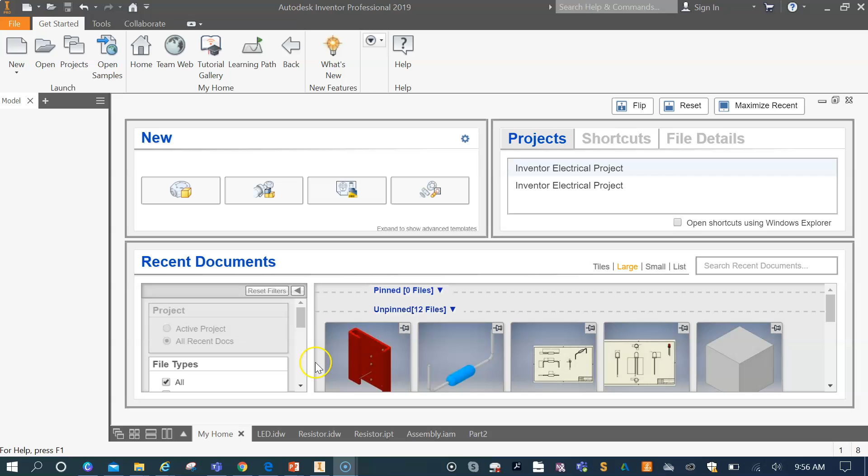So to make the drawing, we're going to go to New. I'm going to scroll down to the drawing section here. I'm just going to make this a little bit bigger so we can see. Alright, so the drawing section here, we're going to go down to this one here.

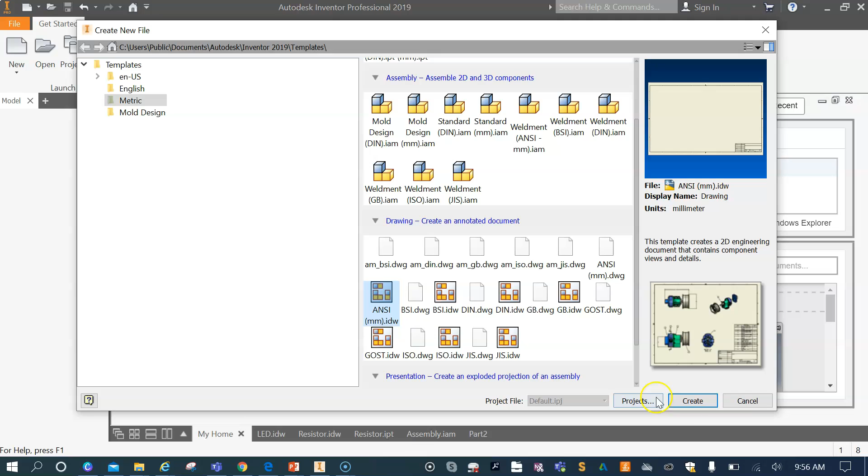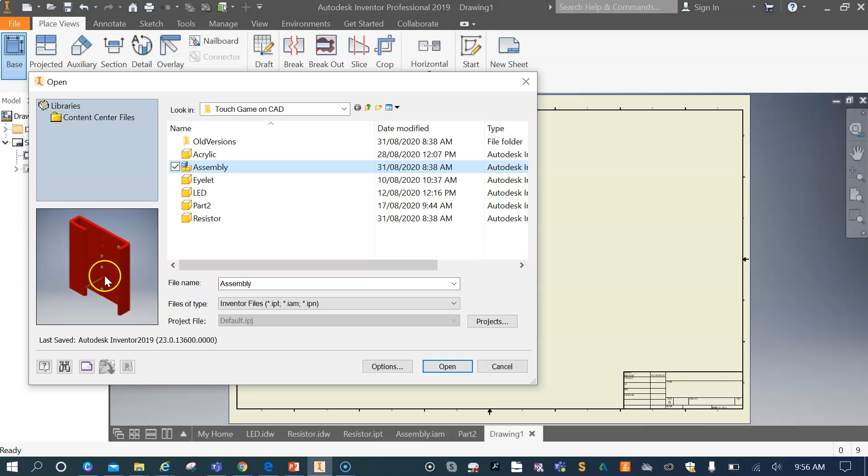Alright, so what we're going to do first is go to Base. And you need to find your file, so click on this icon here. And we're going to click on the assembly. This should have your eyelets in there, your LED, and the acrylic all together. Press open.

Alright, now we can start to see how it's all coming together. So that's a side view. We can increase the size here with the scale.

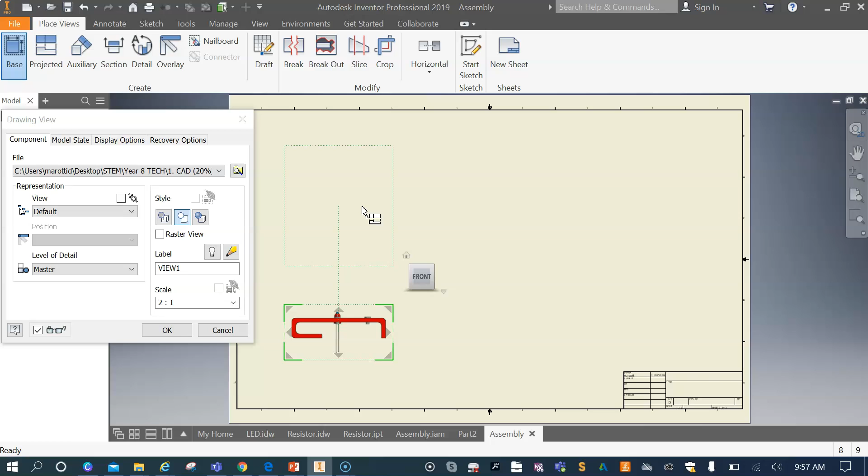We're going to put the side view just in the corner here. Then above, I can click—that'll make a top view. Click over here, okay, and that will show another view there. So in the corner as well, we can click, and that'll give us an isometric view of the touch game.

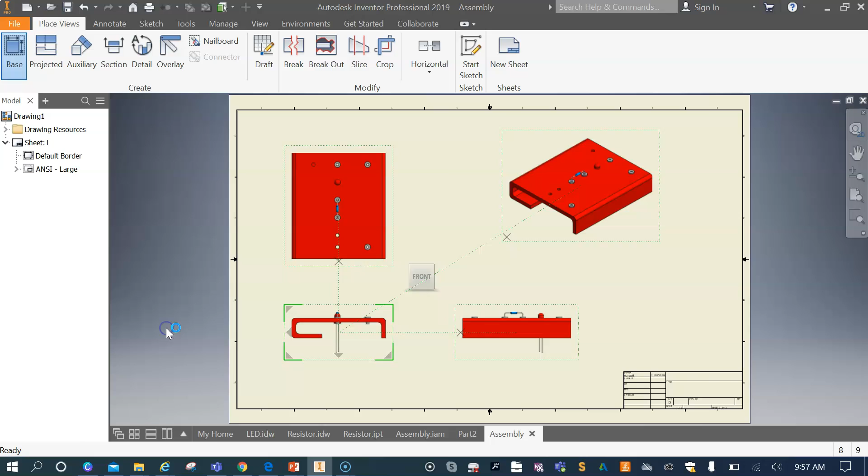Alright, we're going to press OK. Now can you see how on the top view we can't see any of the hidden lines underneath? You should technically be able to see the inside edge here of the acrylic, and same over here. So what we're going to do is double click here on the red section, and we're going to click on this one here, which is hidden line, and press OK. Now all of your hidden lines will appear.

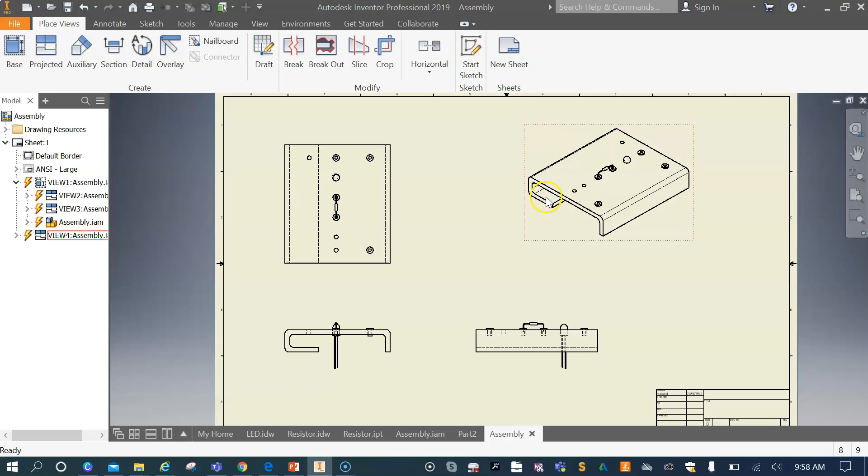With this one here, the isometric view in the corner, if we double click on it, I want you to click on Shaded and press OK. That's obviously going to add some color to it so we can see what it looks like as a finished product. Alright, what we can do now is come up to Annotate.

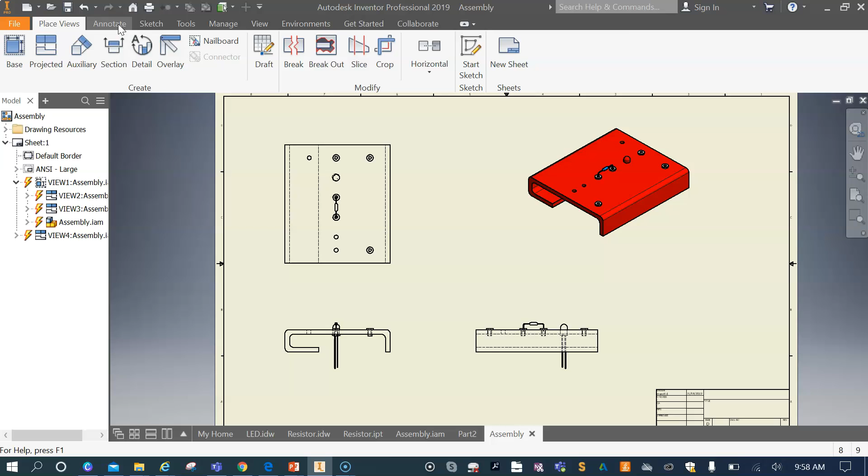Then we can go down to Dimensions, click on that, and now we can start doing our dimensions. Alright, so what I'm going to do is show you how to do the dimensions.

But I'm not going to do all of them—it's going to be your task to then go through and do it for yourself. I'll have a final drawing set up, and you guys have to just go through and try and do it as close as you can to what I've done, and try and get all those dimensions down.

But for example, if we want to get the overall width of the touch game, I'm going to click on one side, click on the other side, and I'm just going to place my dimension there. Just press OK. If I zoom in, there you go, it's 78.

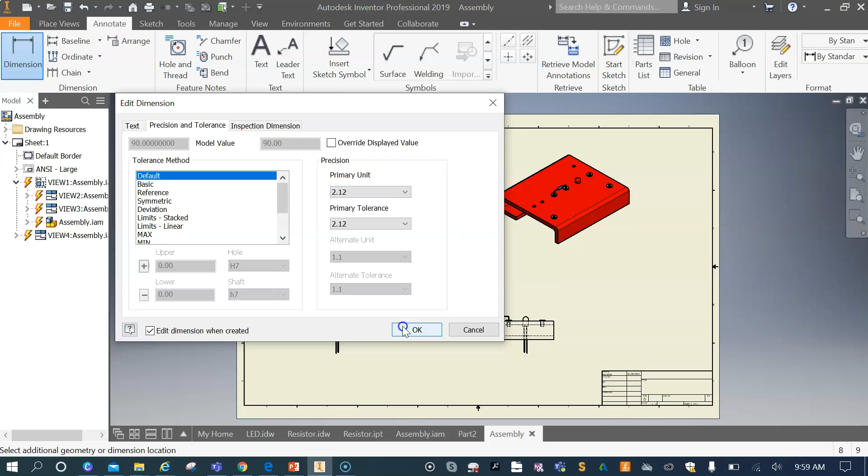Alright, we could grab the total length here as well. Click again, press OK. As you can see, that one was 90.

So you're going to go through and display all the dimensions that I need for your assessment, based on the drawing that I give you. You guys are going to have to work that one out for yourself, but that's just using the dimension tool.

Now what we're going to do is edit this little title block here in the corner. See how there's all this information that hasn't been entered in here yet? I'll show you how to do that now.

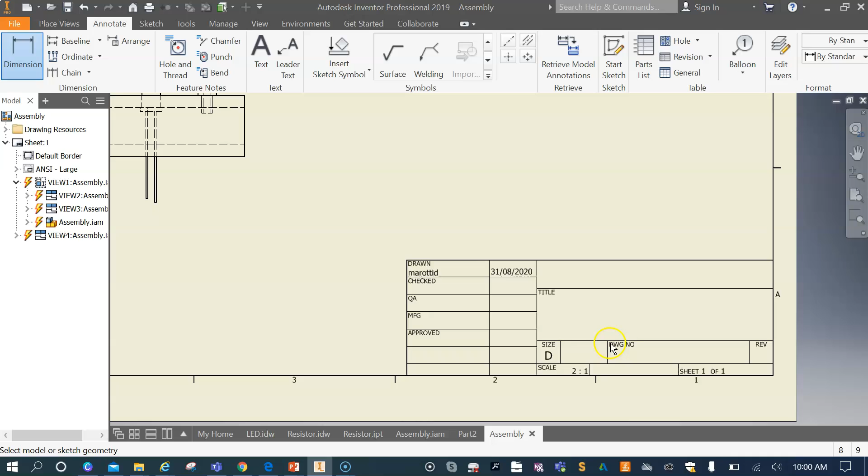First of all, I'm going to click Escape on my keyboard to get rid of dimensions, or you could right click—either one will work, and I'll get rid of the tool. What we're going to do now is go here, right click, and go Edit Definition, and that's going to edit that title block for us.

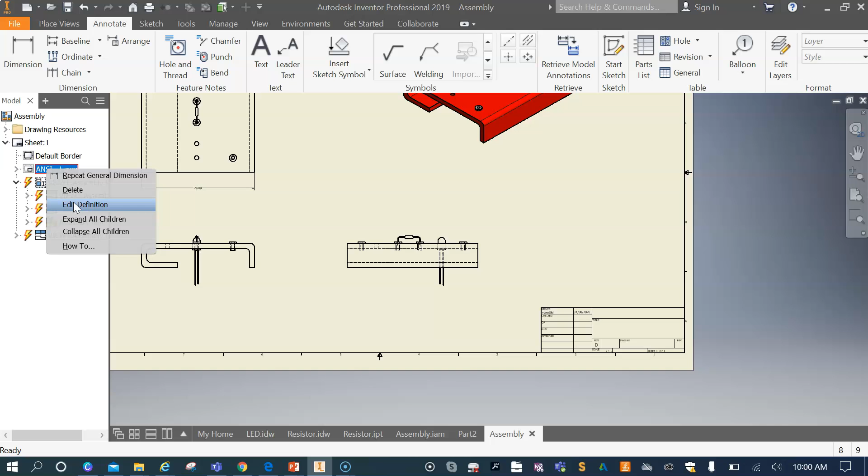Alright, I'm just going to zoom in here. So where it says company, I want you to double click on that. I'm going to highlight all of that and just write Charles Campbell College. Press OK.

For the title, write Touch Game. What I like to do is put that in the center as well, just so it looks a bit neater.

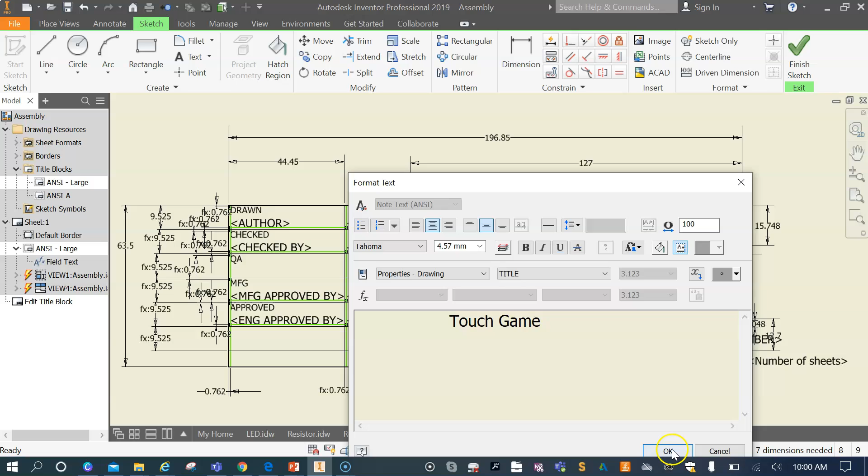The author will be your name, so write in obviously your name, but for me I'll just write... For checked by, you can put my name, so you can just write Mr.

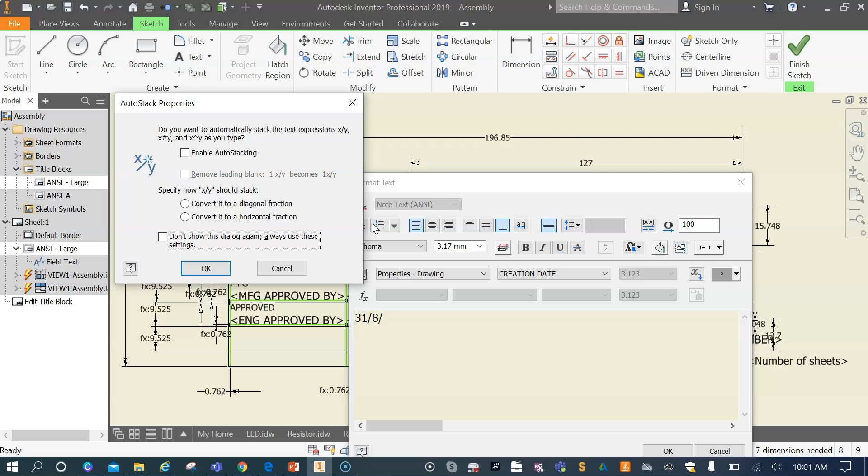Marotti. The creation date, you can obviously do today's date, so I'll double click on it. Alright, so we've got 31st—oops, so let's get rid of the other part—31, 8. Sometimes this will show up, just press OK. Alright, just finish it off.

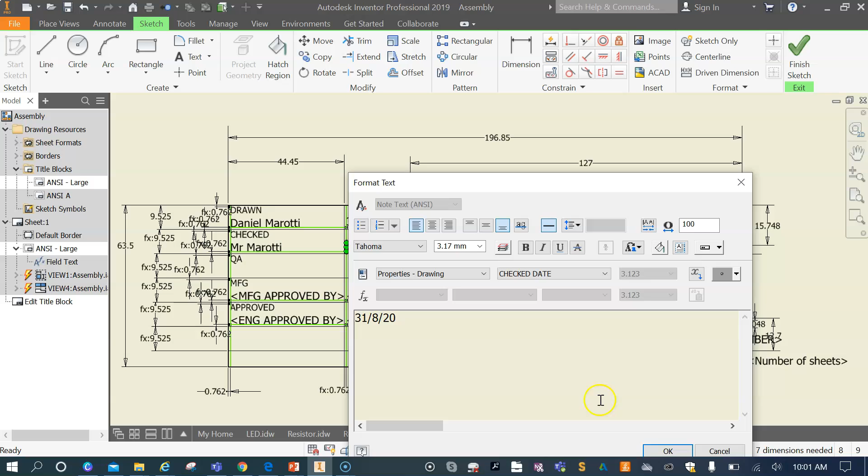So I'm just going to copy, I'm going to use it for the other one as well. So I'm going to press OK. So the date's there. I'm going to double click on this one now, just to make it easier—I'm just going to go paste and press OK. Alright, so I've got both of those on there.

With the other stuff here, we don't really need it. So what I'm going to do is click on it once and hit delete on my keyboard, or you can right click it and go delete as well.

For part number, we're just going to call this one part 1. Okay, enter.

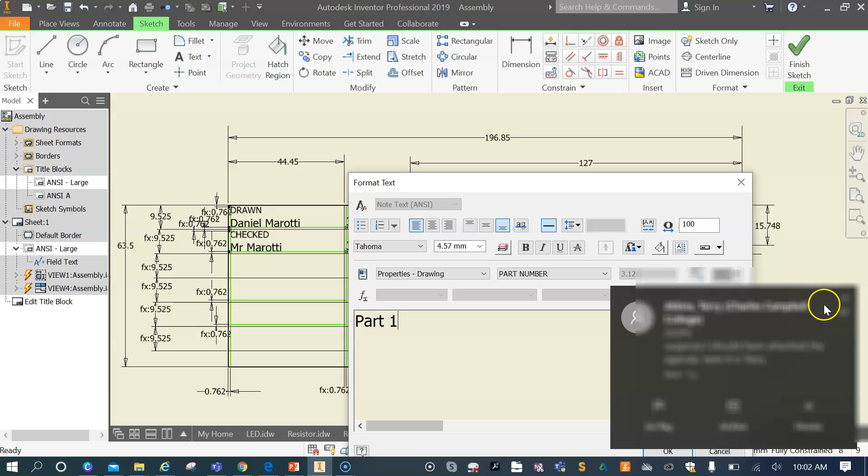Alright, and that should be it for us. So we're just going to go finish sketch, press yes. Alright, so now you've got all the information that we need just for this drawing here.

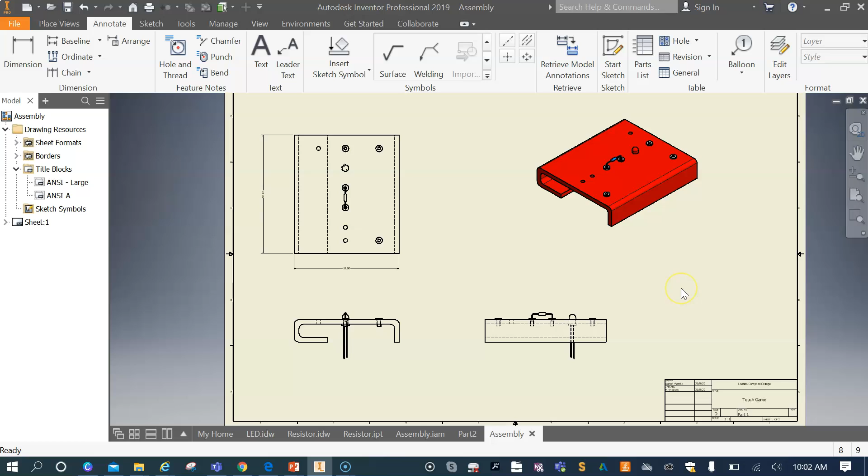So like I said before, you can go through and change, edit all the dimensions that you need based on the drawing that I give you. Alright, so you guys can get that done.

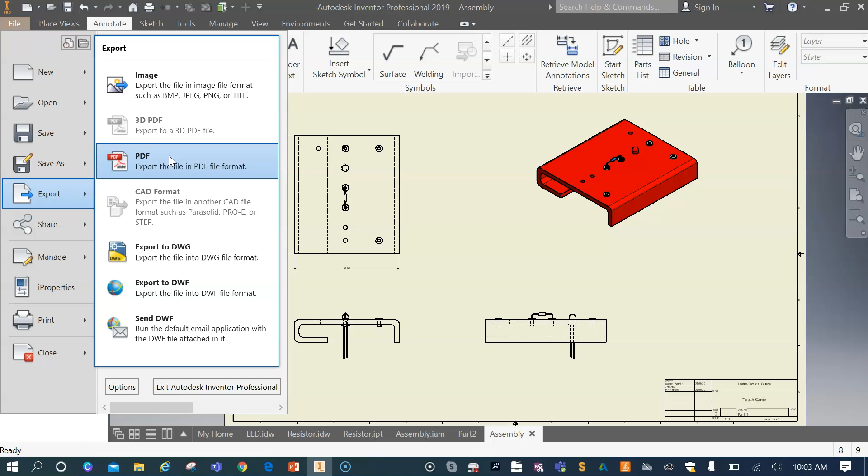To finish it off, all you need to do is go to File. Obviously you can save it, but you can go to Export as a PDF, and you can just type in, or just name the file as finished drawing or whatever else. Then you can submit that to me on Demo.